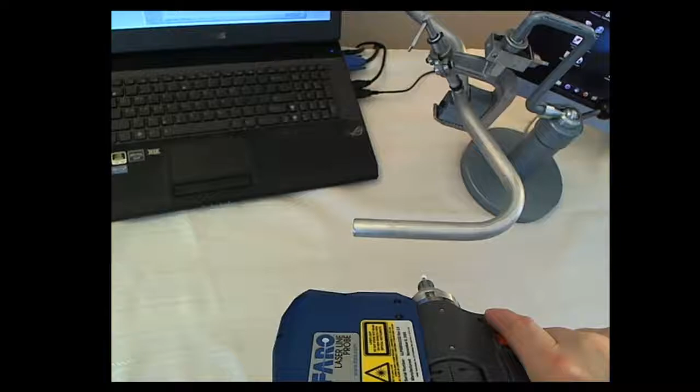This is a VTube laser training video for effective tube scan techniques. The video will cover both end scans and straight section scans using techniques that provide the highest repeatability, even for tube surfaces that are flattened with clamp or crush marks.

To set up VTube for scanning, enter the System Options menu, press Measure 2 tab, then change the maximum number of LLP strings per tangent to allow to 10. Change the maximum number of points per string to 20. Change the number of LLP strings per end scan to 10, and the number of LLP points per string per

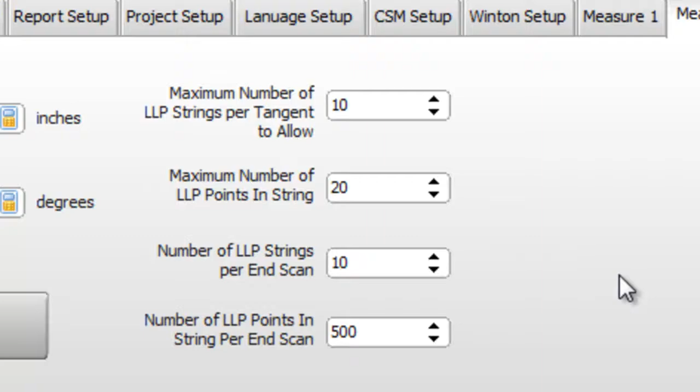end scan to 500. This setup allows VTube to take in the best number of points for both cylinder straights and end scans. For end scans, it is critical to allow the points per string to be very high to ensure accurate end measurements. After you exit from the System Options menu, change to the Measure Setup menu.

Check to be sure the Use Laser checkboxes are enabled. Then set the strings to collect per measure to a value of 10. This will require 10 strings of points to be collected at either end of each straight.

Then start the tube measure and align the probe for an end scan. Use the rangefinder to align the laser along the end of the end straight. Place the end of the beam near the end of the straight, then move the probe so that a part of the beam falls off the straight.

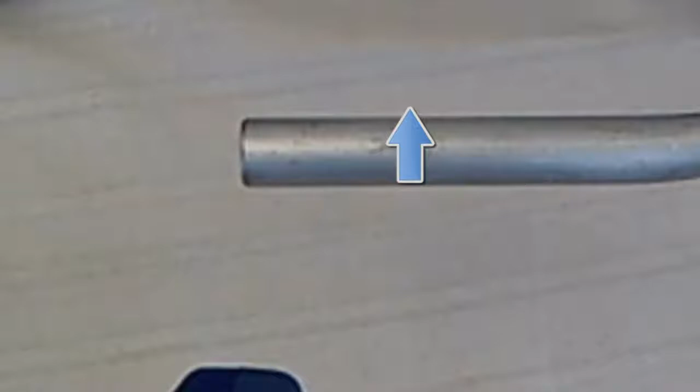Now tilt the scanner 10 or 20 degrees so that the beam catches the end wall of the tube. Press the green button and wave the beam over the end of the tube, being careful to keep the laser on the tube during the entire scan process.

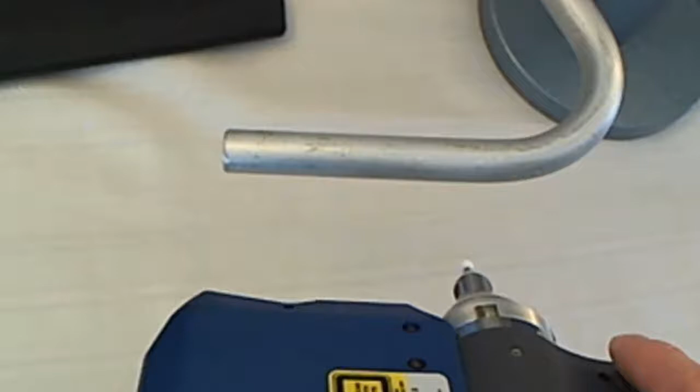To measure a straight, rotate the probe so that the laser string is crossing the tube near the start end of the straight. Align the rangefinder, press the green button, then move the probe to about the middle of the straight. Stop the probe motion, release the green button, then press the green button and continue through the other end of the straight, being careful to stay out of the bend section.

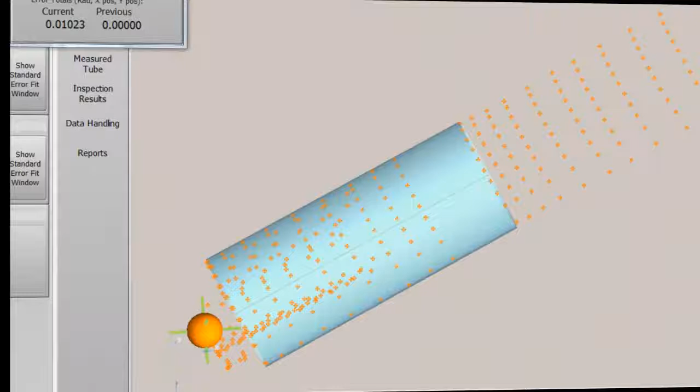This is the on-screen model result of the end scan data. The points are spread out over the tube to give VTube more choices for the tube end trim point. This is the on-screen model result of a straight scan. The first 10 strings are on the left, and the second 10 strings are on the right.

To allow the laser line probe to spread the laser strings this far apart, it is necessary to use a slower scan rate. Good starting values are 1/8 rate or 1/4 rate. The scan rate can be set in the scanner control of the Measure Setup menu.

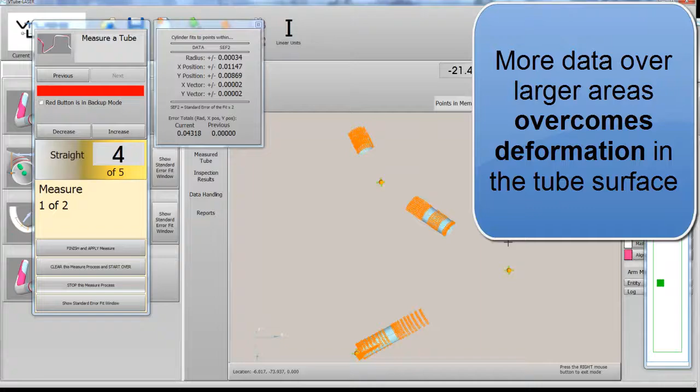This type of scanning overcomes deformation in the tube surface by using more data in the cylinder fit engine. Errors in the cylinder fit window often decrease significantly with more scan data. Here are some other scanning tips to keep in mind.

1. A stable rangefinder indicator generally means that the incoming laser data is also stable. Seek to find scanned orientations where the indicator does not vibrate or shake.

2. If the cylinder fit errors jump significantly, VTube will issue a warning and allow you to make a decision about the next step. If this occurs, then outside non-cylindrical data may have been included in the scan data, and it is a good idea to remeasure at least once to see if the cylinder fit error is cleared.

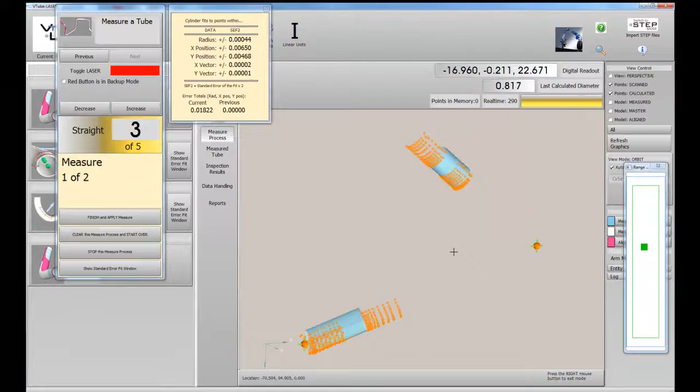3. VTube uses separate diameters, A end and B end, to qualify end scan data. The scanned end data must fall near those two diameters within a default tolerance of plus or minus 1 millimeter, or 39 thousandths of an inch, or VTube will ask for a rescan of the end data.

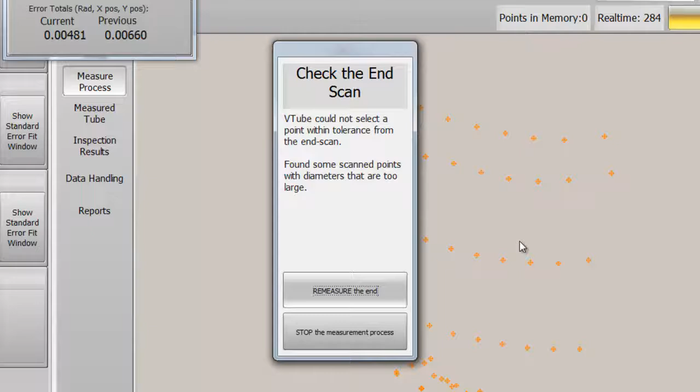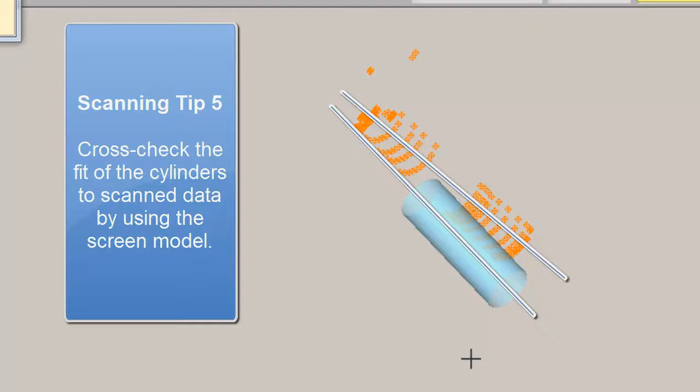4. When measuring straights, avoid measuring forms or components that are not part of the nominal diameter, as they have an adverse effect on the location of the derived center line. 5. Along with the built-in warning dialogues, use the visual model of the scanned points on the screen as a cross-check to be sure that the calculated cylinders closely follow the scanned points.

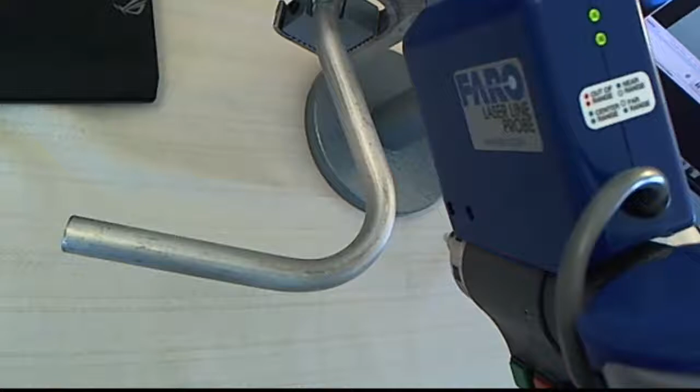Using these methods to scan a tube shape with VTube laser will ensure repeatable and reproducible tube measurements. This concludes the VTube laser training video.